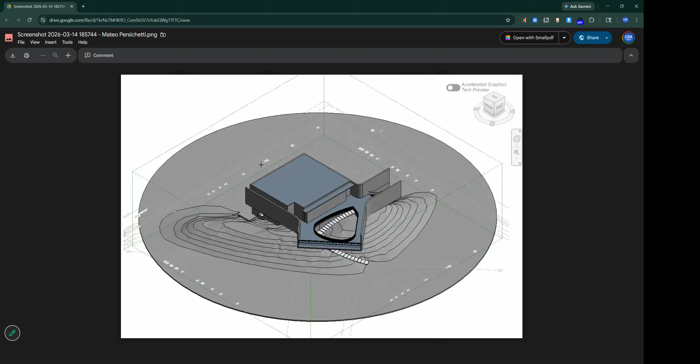So this is good. Now here's what we're going to do for today's class. In order for today's class to be possible, at minimum you would have had to complete target 3. So by my rough calculation, we still have a few people that haven't made target 3 yet.

So even if you have made target 3, you can follow in today's class. What we're going to be doing is detailing the model. It's not going to be very long, so what I'm going to do is we're going to go through the tutorial.

For those of you who haven't reached target 4, I am going to run a little bonus session so that everyone can catch up, because I want to encourage you guys to keep up with the targets. We only have one more week.

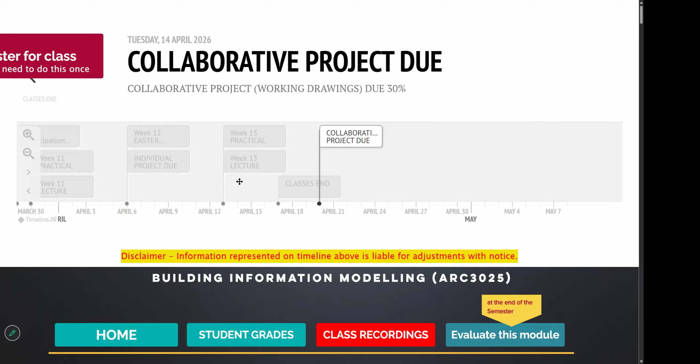All right, guys, because it is dependent on your submission. So I can't stress that enough, that you have to submit your individual project. And this is why I have these checkpoints going week by week, right?

So we are at—where are we? We're here. So today we're going to talk about, we're going to add details. Pretty much the model will be finished today. And—

The lesson that I want us to learn here when we're doing a BIM model is that when you're doing a proper BIM model and drawings, you have to invest time to complete the model first, and then you do your drawings. That is the trade-off when you work in BIM, right?

When you complete the model, that is only half the battle, because remember, at the end of the day, you are delivering sheets and drawings. That is your product as a designer, right?

So if you remember, at the beginning of the class we're forming this—it's almost like we're forming this architectural firm, and you guys are doing the design development phase for a project that I have designed. I have done schematic drawings and I've given you guys the schematic drawings, and you guys are using the schematic drawings to give me

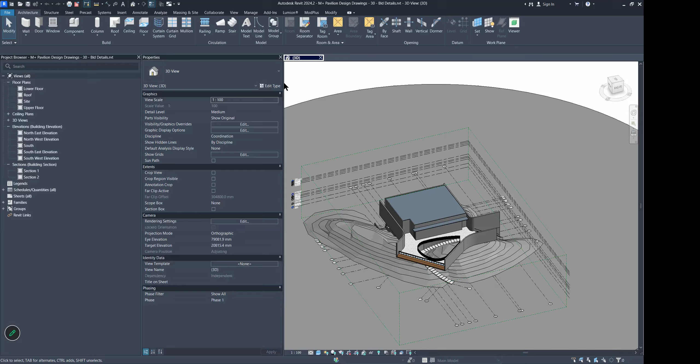Okay, open this up. All right, here we go. So this is where I'm at so far.

If we take a look, by the way, is anybody using the PureRef app? That app that I'm using in the tutorials? No? Nobody tried it out? It's a great little app if you are displaying reference objects while you create any form of artwork.

In our case, we're creating a BIM model. Let me show you here. I think I showed you guys a little earlier. See this.

Okay, here we go. Yes, so this is the app PureRef. It's short for Pure Reference. A lot of artists use this app when they're modeling something and they want to have reference images on the screen while they're modeling. It's primarily for that purpose.

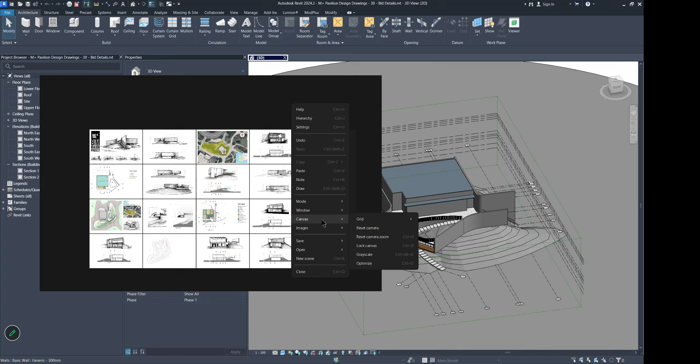For example, you can have... where do you find that now? I don't remember the shortcut. I think it's Control T. No, not transparent mouse. All right, let me go see here. Here, that's it.

What are the settings? Right, for example, you can change the opacity, you can change it to glass. I use this mode sometimes as well, so you can have your drawing without the background, maybe like that.

And maybe you're looking around, you can have this on the screen like that. Other uses: if you are drawing or tracing anything, you can actually overlay this like in Photoshop and trace behind it and stuff like that. So that's the whole idea of PureRef, that's what I've been using to have the drawings on screen while we create stuff.

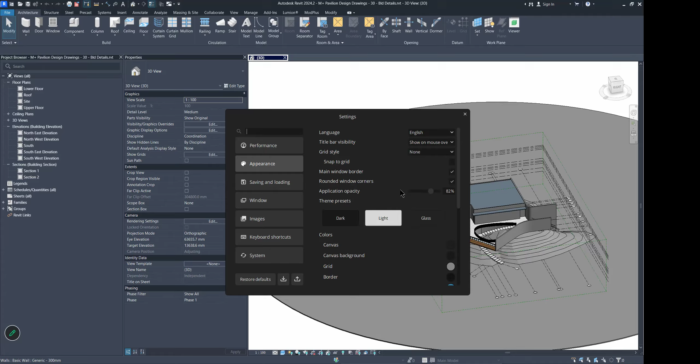Anyway, so what I want to show you guys now is, close that, we're going to be looking at adding some details. For example, if you look at our sketch here, we have this interesting mirror that is going to be on the outside of the building.

And we have some doors. If we look, you can kind of see it here, the doors that lead to the main exhibition space. Then we have a lot of interior details to add, for example bathrooms, bathroom fixtures, the doors, the elevators. All of these details is what we are going to add in for this checkpoint.

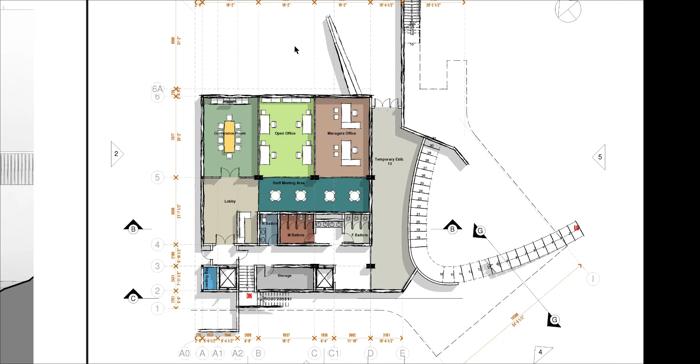We're actually at checkpoint 5, so this is what we're adding for checkpoint 5. Target 4 was last week, 5 is this week, and that will be due on the 22nd. Okay, so let us get going.

Okay, here. All right, so

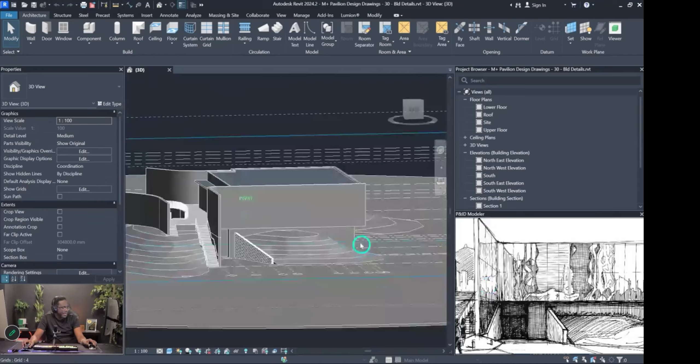What we want to do in our BIM model is find a way to represent this here. If we bring up this view and angle it similar to this view, based on what we're seeing, those reflections, those mirror-like elements are going to be on the facade, kind of like that, and that is what we're seeing here.

One of the ways that we can get this done is by using the curtain wall tool. The curtain wall tool in Revit is very versatile. You can use it to do a number of things, but its intended use is to have a quick way to create storefront windows. However, we are going to repurpose it so that it can act as these reflective mirrors that you see here.

The curtain wall tool is located as a part of the wall tool. If you click the wall tool here, you notice that you're now ready to draw a wall. But notice you can change it from basic wall to curtain wall that you see here.

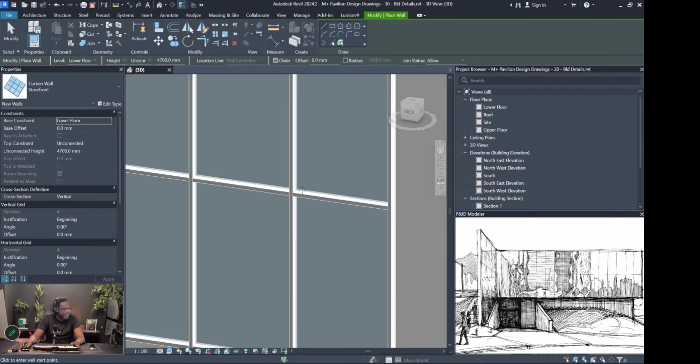Now, by default, if we choose the storefront wall - and I'll just do this in 3D view to demonstrate - and I draw a storefront wall here, this is what it would look like. A typical storefront will have a glass panel and some mullions around it, and depending on the rules of the curtain wall, when you adjust these mullions will auto adjust.

So right away you can see that the curtain wall tool gets us halfway there, except what we actually want to achieve doesn't have any frames. So we could use this and maybe modify or delete the frames in theory.

Instead, what we're going to do is create a curtain wall from scratch. So if I click back this tool here - we created a storefront. Now there is a curtain wall that's not already pre-designed as a storefront, and if I show you an example here, I click it.

I'm going to go to the wall tool here, and change this to just a regular curtain wall, and draw this. What you notice now is that this is also a curtain wall, but it doesn't have all of the mullions of this pre-designed wall - both of them are curtain walls. So usually these are the most common type.

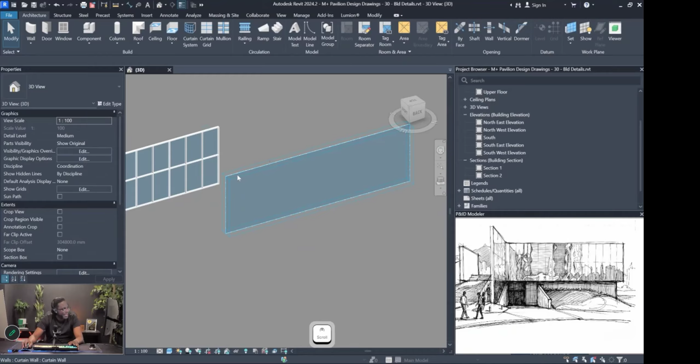The idea of choosing this curtain wall is that I can now go over to the architecture tab, go to curtain grid, and hover over the edges of this to create my own division. So right away you can see that this approach gets us much closer to the result.

Because the idea is that we want to have these reflective glass elements here, and we want to also add the division lines to them, but we don't want mullions. So this method is what we will use.

All right, so let's delete this here and let us start to draw our curtain walls. Now the curtain walls obey the same rules of the road, so to speak, as our regular walls. They have a base constraint and an upper constraint as well.

So if we take a side view here, you can see that we want our curtain wall to fall between pretty much this zone here. We want it to go between this level here, which is facade wall, and this level here, which is cantilever. So that is going to be our vertical restrictions on the curtain wall.

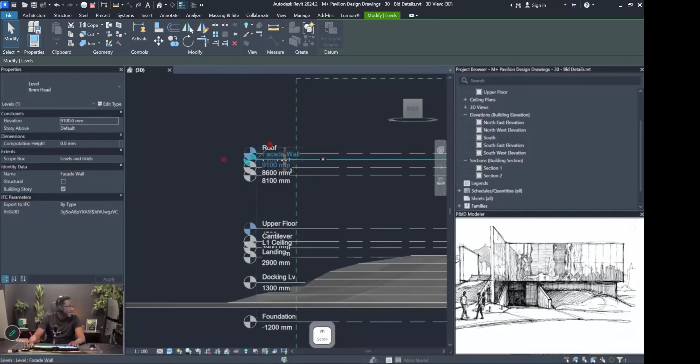So now let's use the pick wall options, and we're going to do this in 3D so that we can see what's happening. We're going to go to architecture, choose wall, and use the curtain wall - not the storefront option, just the curtain wall. Once we click that, yes, we can draw a curtain wall, but instead we're going to use the pick line tool, and then pick the edges of our wall like so.

Right away when you click it, notice that you can see the curtain wall is created based on this wall edge, but it's on the inside of the wall. So we could delete that, and let's do the same thing again.

This time, let's set the base constraint. The base constraint is going to be cantilever, and the upper constraint is going to be facade wall. So now if we use pick line and pick this surface, you'll see we're getting the right heights. Notice that the offset is still on the inside.

So to get a better idea while drawing this, let's go to our plan view, the upper floor plan. This is what it looks like. We're going to have glass all along this wall, so we go to the wall tool, choose the curtain wall tool again, and go to pick line.

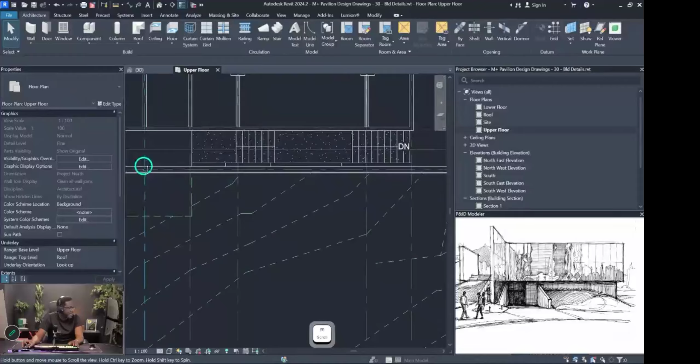Now when we click it here, we get a closer idea of what's happening. Let me press escape, and I just want to take a while to understand what's happening here. When you hover over a curtain wall, you get this blue dash line, which means you have selected all the pieces of the curtain wall. In this case it's just one piece.

Notice I can also tab into selecting the curtain wall glass itself like this, and when you click it, you don't get this dash line. This is going to be important with curtain walls, so let me show you another example.

This is a curtain wall. When I hover and click on this dash line, it selects the entire curtain wall, and then I can drag it and do whatever to it. However, when I tab into selecting just the parts, in this case it just has a single panel part, notice I can't adjust the length or anything. So the first thing you have to do is keep an idea of how you are manipulating your curtain wall. Alright, let me delete this example.

Now if I click on this curtain wall here, I could go to edit type and check out some of the options that I have. These are all the options that the curtain wall has when you click on the entire curtain wall itself. You can change the grid layout, the horizontal layout, materials, and all of these things. Now let me cancel out of that.

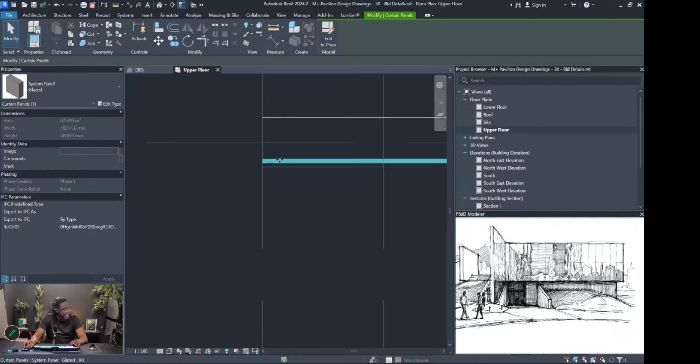Now let's look at what happens when we click on the elements, in this case the glass that makes up the curtain wall. So I'll tab into selecting just the glass now, not the entire curtain wall, and go to edit type. Notice you see a different set of options. So this means you can actually tweak the infills or the parts of the curtain wall individually.

One of the first things I'll probably want to edit is the offset, because notice this is offsetting this way. So I could offset it by 0, and if I apply that, notice now the curtain wall panel is centered. Also, I can offset it by 25 millimeters, which is the same as the thickness of the glass, and if I apply here, actually let's use negative. There we go, now the glass is on the other side.

Now additionally, while I have the glass selected, I can also change the thickness of the glass as well. For example, if I make that 35 millimeters, you'll see the glass getting thicker. So what's happening here is the cross section of the glass is 35 millimeters thick. However, notice that's the full depth of the glass that's here.

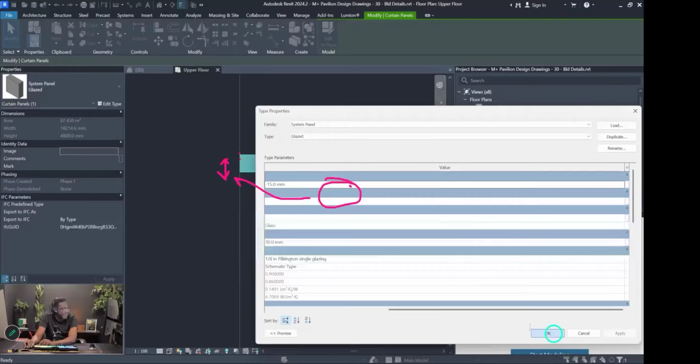If I wanted to have this glass touch this element here, I could change the thickness of the glass to 30 and then change the offset to -15, and you can see what's happening in the background, the glass now comes right on the surface of my wall, because I modified the properties of just the glass itself.

So if I take a look at that in 3D, over this section, you'll see where the glass is now sitting firmly on top of this solid here. So I adjusted the thickness of the glass and the offset of it, but remember the justification is from the center of the glass, so keep that in mind when you're doing offsets.

All right, so if I click on this now, notice that the base level constraint is upper floor. I want to make that cantilever, and the upper floor constraint I want to make that facade wall. Notice that it is in alignment with this.

All right, that's great. Now what we can actually do is click on this wall, and we can use this tool right here, which will just reinitiate the last command. The last command was to make a curtain wall, so it just reinitiated it. Rather than going to architecture wall and clicking curtain wall again, I can just click this to reinitiate whatever object I have selected. Clicking this will create more of that object. So I can go to pick wall again, and I can pick this one.

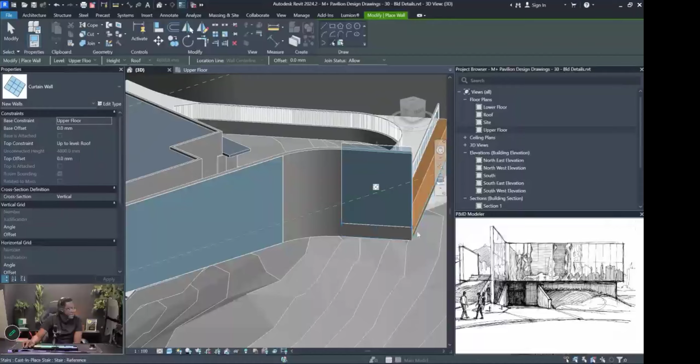And the same thing would apply for this. I would need to change the upper floor to the base constraint to cantilever and the upper floor constraint to facade wall. Oops, I still had the pick line initiated. It's deactivated. There we go. So then we have this here.

Now notice we have this curve, and this is where things get a little tricky. As it is now, if I try to use the curtain wall again, and I pick line, and I pick this curve, notice I will get a diagonal curtain wall, and this is because curtain walls are unable to curve. So we won't be able to use the curtain wall like this, but we can work the system to get what we want, and I'll demonstrate that very quickly to you.

Let's use the concept of the curtain wall. If I create a storefront curtain wall, for example, and I'm going to just draw this example here, just like what we did before, it's going to create a storefront. Now a storefront is made up of panels, and it is made up of mullions. So each of these are actually independent parts.

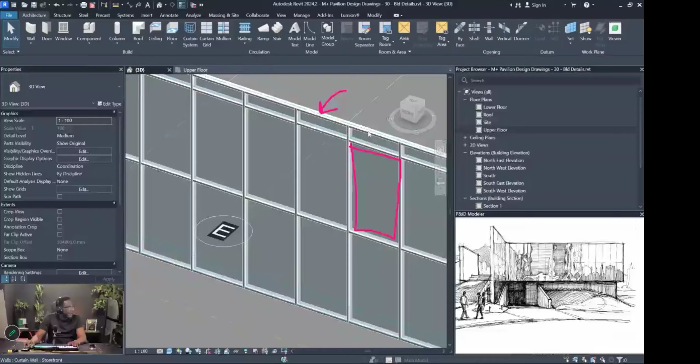For example, if I hover over an individual mullion, I can tab into it. Notice that I can select an individual part. I can select an individual mullion, and I also can select an individual panel. This is very powerful because what this allows you to do is you can swap these parts out with other parts.

For example, if I select this mullion here, first thing I need to do is unpin it, because being pinned, you can't change any options. It's locked, and that's because it is pinned. So I need to click this to unpin it. Then I'm able to swap this out. So I can swap it out for a circular mullion, or I can swap it out for a V mullion. Each one of these parts, I can swap them out.

So for example, if I tab into the panel, I'm going to do the same thing. Let's change this to a circular one so we know it's different. If I tab into this panel here, and of course I'm going to unlock it - remember, this is the number one thing that I always forget to do, I forget to unlock it. If you don't unlock it, you won't be able to swap out that part. So I'm going to unlock it by clicking that there.

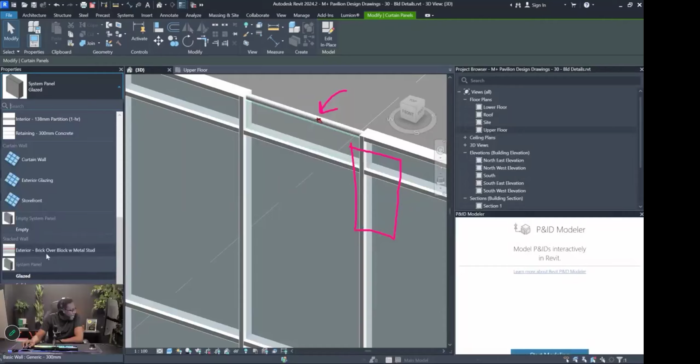And now I can swap this out with other panels. In this case, I have exterior brick panel. I can click that - let's see, I get that message here. Okay, so it's probably because that panel is too small. So let me try this one. Let me unlock it and let me swap it out. Notice that it changes to a different type of wall, but you can't really see the wall because of the size. I can do the same thing again.

So let me undo that, and I can select this panel here, and I can swap it out for an empty panel. What that does is it makes the space empty. So if you look here, I've swapped this out for an empty panel. I've also swapped out the mullion for a round version. This example is just showing you that you can swap parts out.

Now, the reason that we are doing this is that we could select a panel, for example. So let's say I've selected this panel and I've unlocked it. I can swap that panel out for not only curtain wall parts, but also any wall part as well.

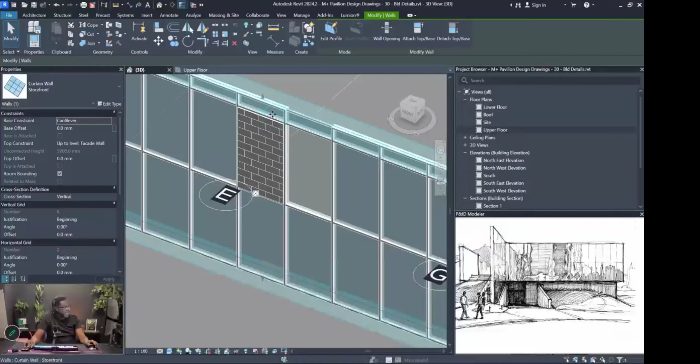So for example, I can swap out the panel for a 200mm CMU wall, and there you go. I have now infilled this curtain wall with a CMU wall. So the ability to swap these things out makes the curtain wall tool so valuable and versatile.

And that is how we're going to solve the problem here with this curve. So let's get back to the curve now, now that we understand a little bit about how to swap out components with the curtain wall tool. So armed with that knowledge, let's go back and look at our curved wall here. Remember, when we choose curtain wall, I'm going to choose the regular curtain wall, the blank one, and if I try to pick lines so I can get the curtain wall to follow this curve, it doesn't.

It goes straight. However, what we can do is select this panel, and I'm going to tab into it. So I've selected that panel now, which is a system panel glazed, and system panel glazed or curtain wall panels cannot be curve bent. Instead, what they are made to do is break down into individual straight pieces.

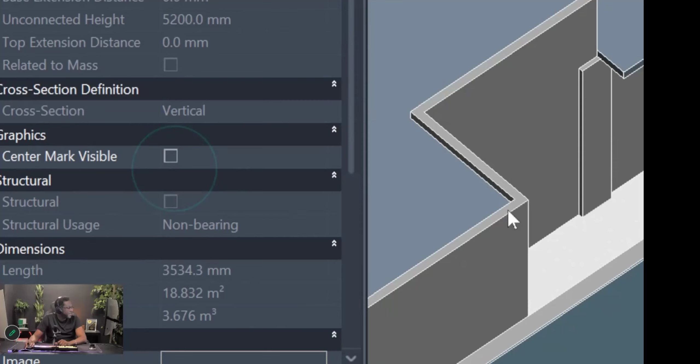However, if I change this out from a system panel to, I'm just going to use CMU wall, then what you notice is that the wall is able to be curved. Now in this case, what we did was put the wall in a panel, and then the panel can now curve. So that is a little trick that we can use to get around having a curved panel.

Now, of course, we don't want the panel to be a brick wall. So in essence, what we need to do to kind of trick Revit into doing this is to create a wall type that is glazing, which is going to be different than a curtain wall panel type. So let's create, instead of using a brick wall, we're going to create a glass wall type just like this. Now to do this, we are going to use a regular wall.

I'm going to go to the wall tool here, and I'm going to draw - I'm not going to use a curtain wall, I'm going to pick any random wall, maybe the generic 150 millimeter, doesn't matter which one. So I've drawn a wall here. Now the objective is that we want this wall to be the same material as this. So essentially we're creating a glass wall.

Now in order to change materials in Revit, if we click on this wall here, we're going to go to edit type. Then we're actually going to duplicate this type here, and we're going to call this glass wall.

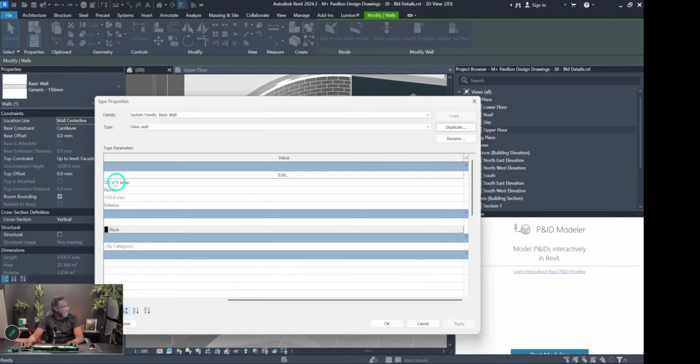All right, now we want this wall to basically look, we want to configure it so this wall pretty much looks like this surface here, right? And in order to do that, the first thing we need to change is the thickness. So let's make this a little smaller.

So if we go to structure, and let me go back there so you can see where I went. Right, so if we go to structure, that tells Revit what thickness to make the walls. And what we're going to do is change it to the same thickness as those walls, which is 30 millimeters. Now in addition to that, we're also going to change the material.

And if we click that, you will see your materials list comes up, and we're going to look for glazing, and I guess we can use this one. So we're going to choose OK on this, and OK. So notice now this has become a glass wall just like this, but the thing is, this is a wall.

So now what we're going to do is click on the CMU wall and trade it out for our glass wall. Now we probably also want to click on this wall here, and we want to let the location line be maybe at the exterior.

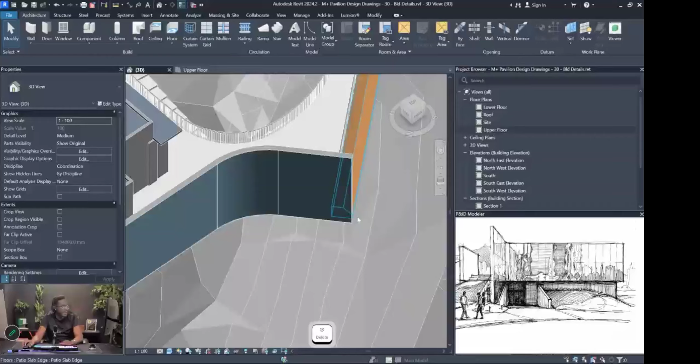So that way now it can be aligned with our wall, with the glass wall, which is a curtain wall panel. So we're going to delete this sample here. So this is how we get the surface of this to be a glass wall.

Now we're going to do the same thing here, and we're going to go to wall, and we're going to draw a curtain wall, and we're going to use pick line again. I'm going to pick these surfaces here. We're not going to get the curve, remember.

We're going to pick the surface here. All right, so we need to change the levels for this one, since this one is a little lower than that one. If we take a front view, we can see that this side of the wall is going to level 2 ceiling. So all we need to do is select our new glass walls and change the top constraint to level 2 ceiling. There we go. Now we're going to do the same thing again.

We're going to swap out this system panel glaze, because remember, system panel glaze is unable to curve, and we're going to swap that out for our glass wall. Then we want to fix the center line justification to, let's try exterior. Right, so that's what we get. So now we have created those mirrors, those reflectors, on that glass wall.

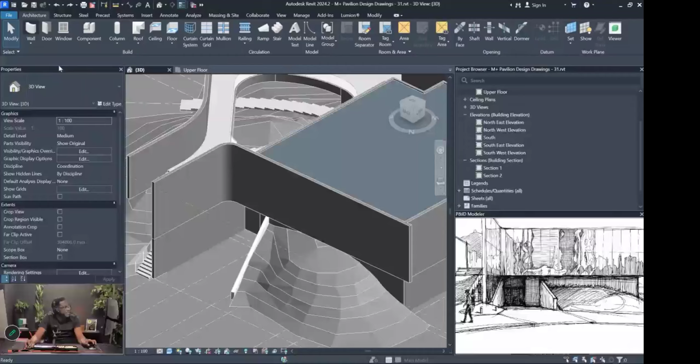All right, now that we have these surfaces covered with glass, let's also do this surface as well, because we can see that this is also happening here. So again, we're going to choose curtain wall, pick line, and pick this surface here. We need to set the height of that. We're going to click the curve again, and click this face of the wall. We're going to select this guy here, and swap him out for a glass wall.

Hold on, let's do that again. You have to make sure that you select the actual infill panel, right? And then we're going to change this to glass wall. It's actually creating two glass walls. Hold on. So let's make sure that we select that panel, and then we're going to choose the same glass wall there.

So now it's curved. A couple of things. Firstly, this is a little bit shorter, that's why we're not seeing it good. Also, we need to set this location line to finish face exterior, and then we're also going to set the height of this. So if we take a look here, let's spin this around. Right, this actually goes up to this height, which is the roof level.

So we're going to select these mirror-like elevation elements, and we are going to select all three of them. Let's select one at a time, and we're going to make the top go up to roof, and this curved one we can actually just adjust it manually.

All right, good stuff. Now if you notice, this wall here has this kind of coming at an angle. Let's see if there's a better view. Well, that's pretty much a view. So you can see this comes down at an angle. So what we're expecting is that this glass will come down. So what we can do for that is click on this here, go to edit profile, select these two guys, and just pull it down like that. It's okay. Right, and there we have it.

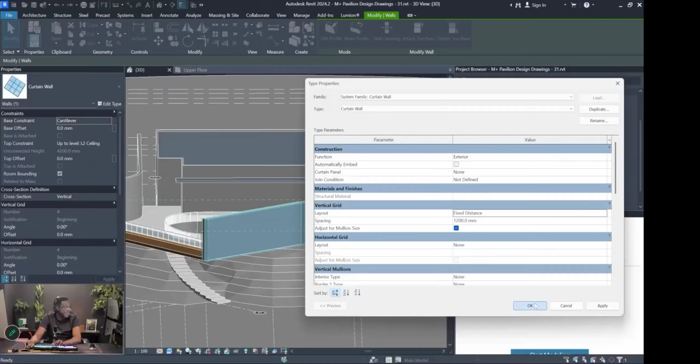Now if we want to divide these lines nicely into individual panes, we can select this curtain wall type and go to edit type. Whenever we edit anything in here, it's going to edit for all the curtain walls that fall under this type. What we want to do is mess around with the vertical grid, so we can set all of these curtain wall types to have a vertical grid with a fixed distance, and make them all 4 feet. Let's round it off to 1200 and choose OK. And you'll notice now that all of these are divided.

So let's go back into edit type again, and this time we're not going to mess with the vertical grid, but the horizontal grid. We're going to say fixed distance, and make this, let's try 8 feet, or let's do 2400. Apply. There we go, you can see it's divided there. Let's go to 4000. No, 2500, 1800. You can see that, see this now, that's the division of everything.

So there we go, now we have created those elements. Well, this one here is not going to do automatically, so we're probably going to have to cut this, or we can actually move it. If we hover to the dash line, we can move it. We need to unlock it first, and we can move this dash line here. Same thing for this, unlock and then move this dash line up. So now everything is in alignment. All right, so that is how you get these elements, these reflectors, to be on the outside of the building.

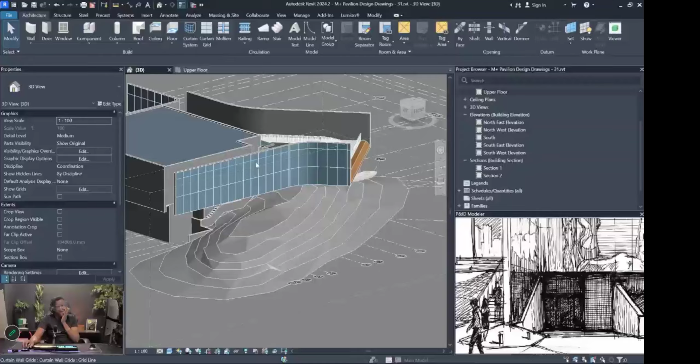All right, so now that we have these curtain walls, now we're going to go ahead and add in these doors that you see here.

If we take a look at our sketch, you can see that along here we have some doors. Let's take a different view. We can kind of see these doors here, that's along the front, and we get a better look if we look at this section. So facing the patio, all along here there are going to be doors - 1, 2, 3, 4, 7 doors to be exact, and then another smaller door here.

We also have doors on the lower floor in various places, so we're going to insert most of these doors now. The first door we want to insert is going to be along here. Now, rather than inserting multiple doors and worrying about the width of each door, we're going to use the curtain wall tool.

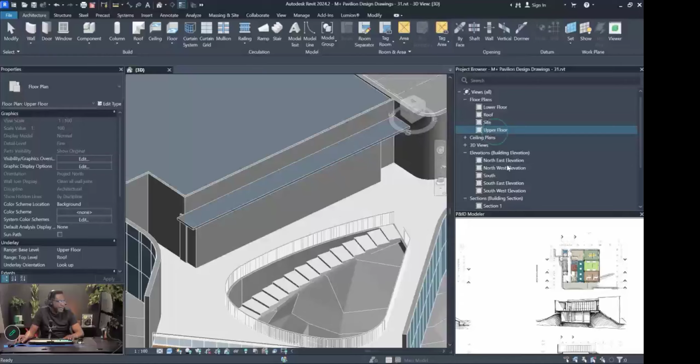So we're going to go up to the wall tool again, and this time we're going to go to the upper floor plan. If we zoom in here, you can see the idea is we want to have doors all along here, right? All along here.

So in 3D view, let's go ahead and use the section box here. Let's cut down to see what's happening. Okay, so on the upper floor, the reason we're seeing these lines here is because these walls are coming right up to the surface of the floor.

So we need to select these walls here and say attach top base, and we need to attach the top - make sure you're on top - to this floor that is here. Let's see if we can select that floor. There we go. Attach top base, select the floor, and we want to do the same thing for all these walls.

Now, that is going to be one of the main things that you will notice throughout the model: you are going to have to select all your walls and attach them to the top and bottom of your slabs, right? The neater your BIM model is, the less work you will have when it comes to generating your drawings.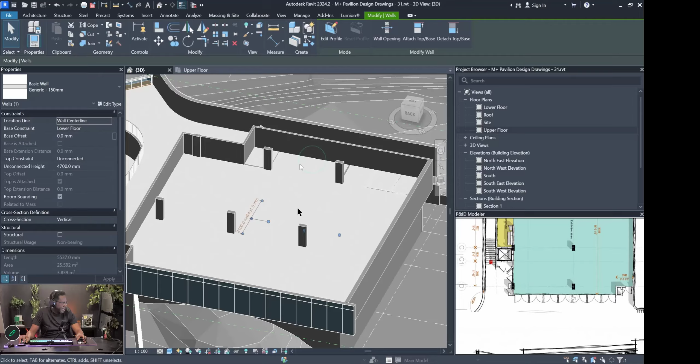The floor, and we want to do the same thing for all these walls. There we go. All right, so now on the upper floor, this is what we get.

So we also need to remove this wall. This wall should - let's take a look at that in 3D here. There is actually no wall there, this is actually an opening, so this is fine. If I take this up, there we go - you can see that this wall here is really just an opening that's here. So we're going to have the doors all along this wall that's here.

So heading back to the upper floor, we will go to curtain wall. This time we're going to go to storefront, and before we draw, we're going to create our own storefront. So we're going to go to edit type, and we're going to duplicate this curtain wall type, and we're going to call it entry doors. We're not going to change any options yet, and then we're going to draw this curtain wall inside this. Okay, hold on, let's do this again.

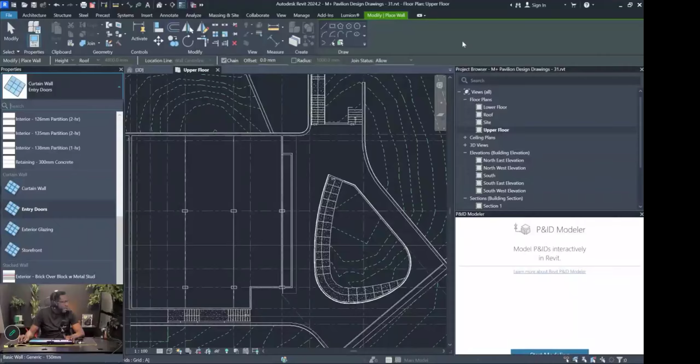All right, so with that curtain wall we just created called entry doors, we're going to draw that curtain wall in the middle of the wall. And if we look in 3D, this is what we get.

Let's disable the section box by unchecking it here. There we go, so this is what we get for the curtain walls. Now, of course, what we want to do is let the curtain wall go up to this level here underneath that entry slab. If we look on our elevation, you can see that the entry slab height is going to be on what we call level 2 ceiling. So we're going to select this curtain wall, and we're going to let the top constraint be level 2 ceiling. There we go.

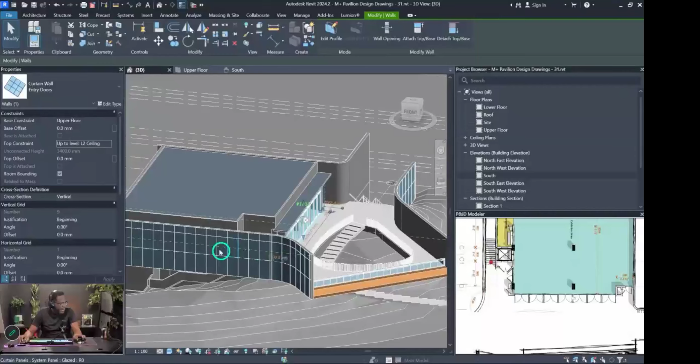Now, because we're having all doors, we don't need this horizontal element here. Now, we use the curtain wall to create these reflecting panels on the outside, and we took a blank curtain wall and divided it up. So in this case, what we're going to do is the same thing.

We're going to choose the curtain wall tool and go into edit type, and we're going to say for our vertical grid we want none. So if we choose OK, let's see, and what we're going to do is if we tab, you can tab into the... yes, let's actually undo that.

What we actually want to do is, if we go back into edit type here, is not to remove the vertical grid but the horizontal grid, right? So the horizontal grid would be equal to these grids here, and the vertical grids would be equal to these here.

So in order to remove the horizontal grid, we won't use these settings, because if you choose that you don't want any horizontal grid, you're actually going to get an error saying you need to delete them manually. So what we're going to do is tab into the grid here, ensure that you unpin the grid, and then you just hit delete, and that's how you get rid of the grid.

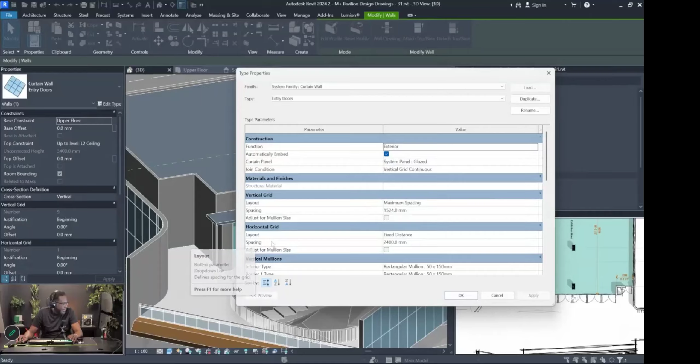Now we need a total of 7 doors, but we have more than 7 spaces here. To fix that, we're going to go back into the curtain wall type settings, and say... vertical grids, put that to a fixed number. We choose OK, and then where it says number of vertical grids, we're going to put that to 7, and now we have 7 spaces.

Now what we need to do is change these 7 spaces from glass panels to doors, and to do that we would need to replace each of these panels, just as how we had replaced this panel here with a wall. In this case, we want to replace these panels with a door. So if we click on the curtain wall tool here, go into edit type, we can see here where it says curtain wall panel. Right now it's set to glazed.

We can actually change that to a door. So if we scroll, you might see that we can change it to walls, we can change it to empty, but we have no doors as options to change the panel to. So we're going to choose cancel. We're going to load in some doors.

So we're going to go to architecture—insert rather—and then go to load family. Once this is up in the default folder, we're going to go into doors. This is important because there are different types of doors, and we're looking for particularly curtain wall infill doors. You will know that because you will see it has the curtain wall distinction in front of them. So all of these doors here can be inserted into a curtain wall, but if, for example, you input a regular door, those doors cannot be inputted into a curtain wall.

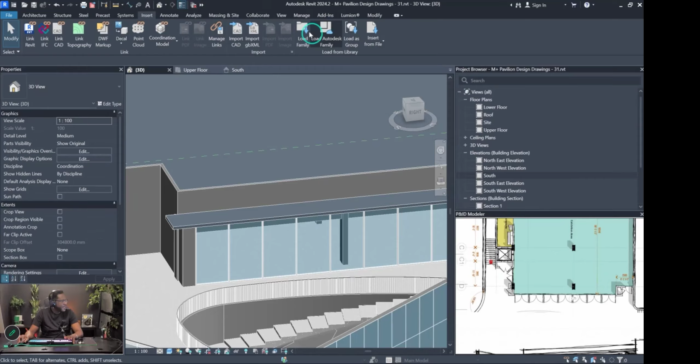Now we're not finding that curtain wall door, because that door was actually not a curtain wall door. So if this happens to you, where you don't see the curtain wall door when you try to swap these panels, just go back to insert load family and choose another door. We're going to choose this one called door curtain wall double storefront. This is the actual correct one.

Now we're going to go into curtain walls here and go back to the curtain wall panel that we see here, and there we go. Change it to those doors, and we're going to choose OK. So now we have these doors, and they actually have handles, but you're not seeing them because the handles are set to show only when the detail level is set to fine.

So there they are. Now we have these curtain wall doors. Now we do have some other doors that we need to place. For example, we have a door here and a door here. So let's go ahead and start placing these other doors.

And to do that, we're going to go to the floor plan that's here. And in our floor plan, well, we can actually correct this, because notice that we're seeing this as a wall here. The reason for that is because of the cut plane. So before we add the doors, let's go ahead and edit that cut plane.

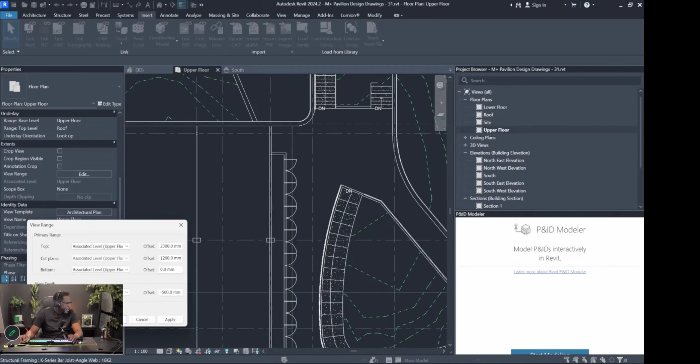So we're going to go ahead and change our view range, and set the cut plane here, and change the view depth. Let's change the view depth to 0. There we go. Okay. So we're actually seeing too low, we're seeing below, and that's why we're seeing this line here. It was the view depth.

So let's go ahead and add these doors. We're going to go to architecture, then doors. Now if we see here, we only have a single flush door, so we need to load more door families. We do that by hitting the load family here.

Now, a quick thing to notice, when I go into, for example, doors or windows or any category here, components, there is always a load family that's here. Now, if I am on doors and then I go to load family, I am only able to load doors into the project. So for example, if I go to windows and try to load a window, it's going to say you cannot load windows because you selected door and then you're trying to load a window family, which doesn't work. So if you want to load any family into the project, you would go to insert and then go to load family. This allows you to load any family—doors, windows, curtain walls, anything.

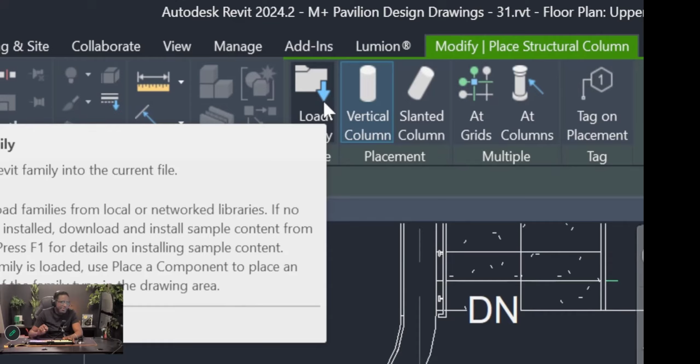But once you go into a particular category, so for example, if you go into columns and then go into load family, you're only going to be able to load columns. So this is one of those little things you have to notice about loading families into your project.

So in our case, we're going to go ahead and go to doors and load the doors, and let's load some commercial doors. So we're going to go to commercial and let's load the commercial single door in, and this is going to let us choose what size door we want to load in. So let's choose this one, 36 by 96. We can load that in, and this is going to be on this side.

All right, so we're keeping in mind what's happening on the actual plan. We have this little space right here, so let's go ahead and get that in. So I'm going to copy this here and extend this. I'm going to use the trim tool and trim this up like that. So we're getting this little space in here.

Then we have a little small door that's in this space here. So we're just going to use the ordinary door, maybe one of these. There we go.

And we can adjust the door width. So for this door here, we're going to go to edit type and duplicate, and we're going to call this closet door 2 feet. Then we're going to go into the door width and change that to 2 feet. It will give us the millimeter equivalent. The reason why this is giving us millimeter is because this template was started in millimeters, and this door was in this template as a metric door, so it's going to always convert it to metric. We're going to choose OK.

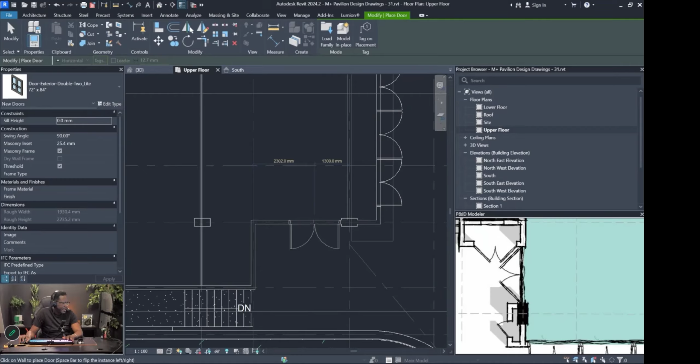So we're going to go back to doors and we're going to load in the double door. We're going to take 72. Yeah, let's take that one. So these doors are somewhere about right here based on our sketch diagram. We have another little closet that's going to be right here.

So we are going to select this wall and choose this option here to create similar, so we know we'll be creating a similar type of wall. Okay, let's put it in first. Let's trim this up and let's align this. There we go, maybe it's a little smaller.

We can probably make the internal measurements in here, so let's set this to something reasonable. So we're going to tab and move this dimension and tab to here. And we're going to set this to 2 feet. All right, so we know that this is 2 feet.

Then we're going to add that closet door 2 feet to here. I'm pressing space bar to swap it around. There we go, now there's another closet here. And then there's going to be an elevator here in this section.

So let's go ahead and move this down to here. We'll choose this option here, draw another wall here. And then we're going to use a trim tool, TR shortcut, and trim this up. So that's going to be that elevator that we have there.

In front of the elevator, we actually have another storage area. So we're going to carry this up and draw another wall like this. Use a trim tool, trim that up. We're going to put that, let's align that. Then we choose this door, which we're going to put another door like that here.

This door actually swings out. All right, now we can actually control these swings. So we can set these swings to like 30 degrees. Yes, this one here doesn't have a swing, but these doors do have a swing that you can control, and so does this one as well. This one has a swing, this one doesn't.

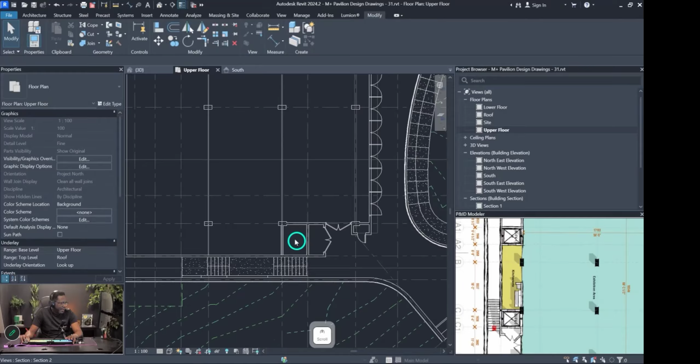All right, now let's continue putting in these doors. Okay, so we have an elevator that's going to go here, and we have another elevator that's going to be down here. So this space here is going to be equal to this space here.

So we need to add some walls in that space. So let's go ahead and I'm going to choose one of these walls, and this one is going to go all the way back. There we go. All right, now this elevator opens on this side here, and this elevator here opens on this side.

Now, in order to load the elevator, what we need to do is, an elevator is not a door, it's not a window, it falls under component, right? So a component is pretty much any object that you insert into Revit. So while you're under component and you go to load family, you will be able to load the elevator. But if you are under window or door and you go to load family, you will not be able to load the elevator. So that's an important point.

So I'm going to go to component, then I'm going to go to load family. Then under the default family folder, you're going to look for vertical circulation. And we have two elevators here: electric and hydraulic. So we're going to choose electric and choose open. Now, once we see that, we'll have the elevator to place.

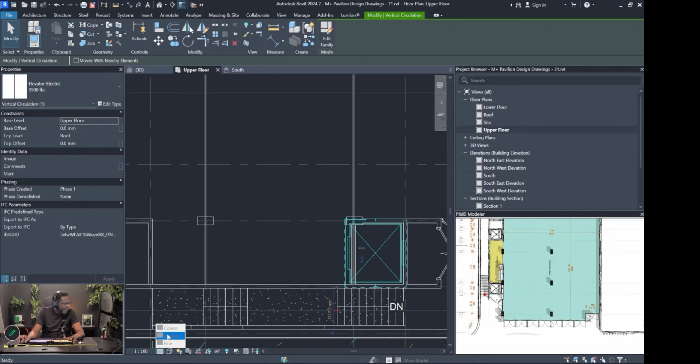So we're going to drop the elevator here. Let's rotate it, so this elevator opens on this side here. Now, keep in mind that depending on your detail level, it will depend on how much information the elevator shows.

Now, let's get the dimension of this space here. So if I go to DI dimension, we can see this space here. And if we click here and we go to edit type, you can see we have the overall dimensions here: the width and the depth.

So ideally, we would want the width to be 2281 and the depth to be 1786. And this is just saying that it's going to cause an error when it's trying to reconfigure the sketch. So you can see it reconfigured it here, but the cab width and depth needs to also be changed.

So let's go back into edit type. So the cab width and depth needs to be smaller than the width and the depth. So the depth here is 1786. So we're going to make the cab width be, let's try 1600, and no, this is the depth.

So we're going to let the depth be 1600, and then the width is 2281 here. We're going to make the cab width be maybe 2100. All right, that's a little smaller. I think they need to be a little smaller as well. Let's try 2000 and 1500. There we go, so this is much better.

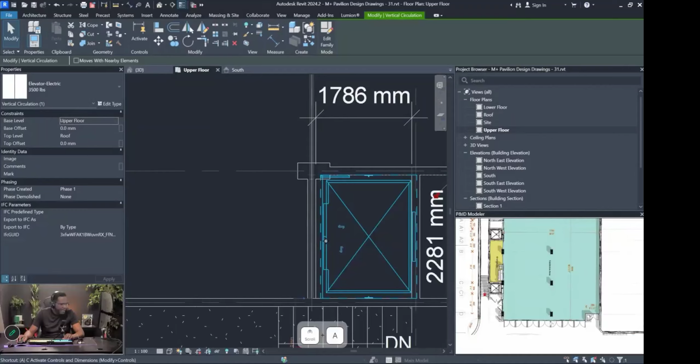So you might notice that you have to set these dimensions up manually. So now we should be able to fit this in. There we go, all right. Now we're going to copy this over to this one here, which is around about the same.

We're going to flip this side to open. All right, so now we have the elevators in. We need to insert the elevator doors, and to do that we're going to go back to component, load family.

And then you notice we see the elevator doors here. So we're going to use a single side door, because these elevators might not be that big. Okay, let's use a double door. Okay, let's open that, all right, then we're going to insert the door.

Now these go into walls, so we're going to insert a door here as well. There we go, and we can line this up. All right, so we have our elevator and elevator doors in. So let's delete those dimensions there, and that's looking nice.

Okay, now let's go to the lower floor. All right, so let's look at what we have on the lower floor. So on the lower floor we have some entry doors that's going to be on this side here. Let's use our floor plan here. So if we look at this section here, which is what we have here, we do have some doors here.

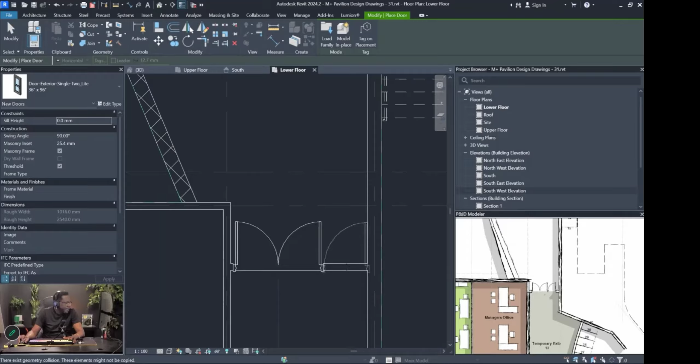So we're going to put a double door, so we're going to put our double door here. It's going this way, and then we're going to put a single door right beside it. Select them and we're going to move this all the way to the end. Let's use the align tool.

All right, then we have some doors in this, well, this space is going to be open because this is an open office. So we're going to remove these, and then we're going to put some doors in this curtain wall that's here, but we'll need to customize it.

So with the curtain wall selected, we're going to hit this icon here, and this will take us to a 3D view showing the curtain wall, which is this guy here. Let me expand it out a little bit. Okay.

So I can see where I'm at. Okay, so this is it here. So this has a double door that's going to be here.

What we can do to even out these spaces is we can select the curtain wall, and let's go to edit type here. So let's first change it to, we're going to call this meeting room curtain wall, and we're going to say that the vertical spacing, we're going to set that to fixed number. We're going to have this at 4.

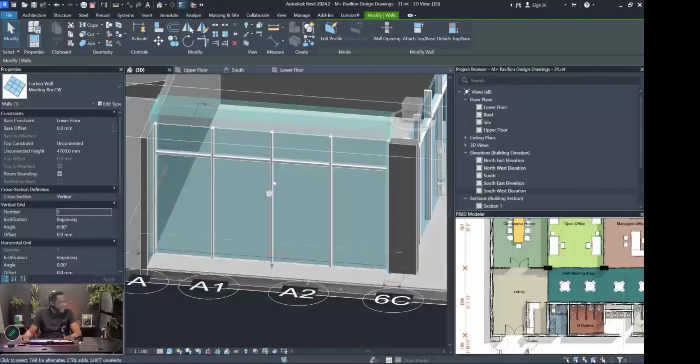No, let's have it at 2. Now let's put it at 3, so it will divide the space into 3, and then we're going to modify it. We're going to tab into this division. Again, this is where you see that dash line, if you can see that there. And we're going to unpin it, and then we're going to delete it.

Now, if we notice here, if we try to hit delete even after unpinning it and it's not deleting, the problem is that the grid lines are tied to the makeup of the curtain wall. So let's go back to curtain wall, and what we have to do is we have to say, okay, the grid, what we set to fixed number, we're going to set it to none. So that way the division of the grids isn't tied explicitly to the grid layout.

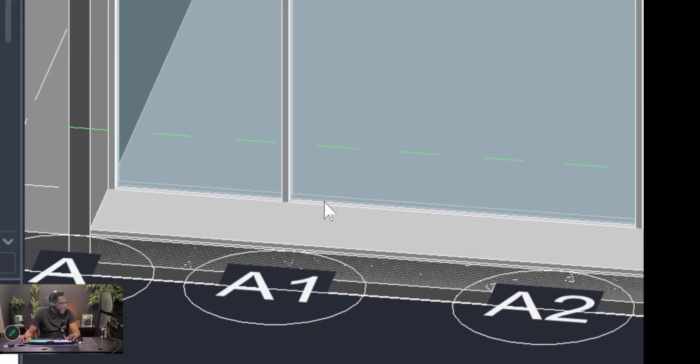So it's going to warn us that it will not be associated with the grid layout. That will give us the freedom to now remove any grid lines that we want to remove. And then now we can tab into the curtain wall here. We can get to, there we go. And then we're going to unpin this curtain wall panel and swap this out with a curtain wall double door like that. So that's how we get that meeting room there.

So let's go back to our lower floor, and we can see that we have that door there.

Now we need to add in this bathroom area here and these bathroom walls. We can see that this wall is pretty much at the halfway point between this space here and that space here. So what we can do is use detail line and draw a line from here to here.

The halfway point is going to be about this area here, so we're going to choose this wall, and we're just putting in some walls to set up this space first. Then we're going to trim it up and remove these construction lines. Let's trim this up to here, so that's going to be our space, right here.

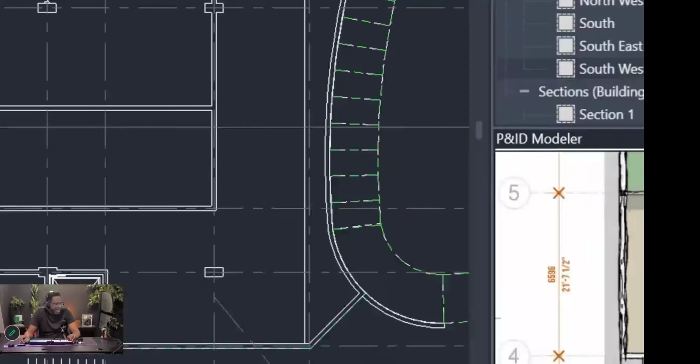Then we need to divide these spaces based on what we have. We can see that we're going to have a male and female bathroom, right here. This wall here is going to be on this grid, so we know already that we're going to have a wall on this grid. We know the other walls will be somewhere, one about right here, and another about right here. Even if we don't have the exact locations, we're just putting in the rough locations of the walls first.

We're going to have another wall here, and this is mainly to carry all the pipes, in this area here. Now we need to put in the bathroom stalls and all of the water closets, and of course the doors.

Now, in order to place the toilet stalls, we are going to depend on the built-in standards that Revit has, and that will help us determine the length of these rooms. So we're going to go to component, go to insert, and then head over to the main root folder.

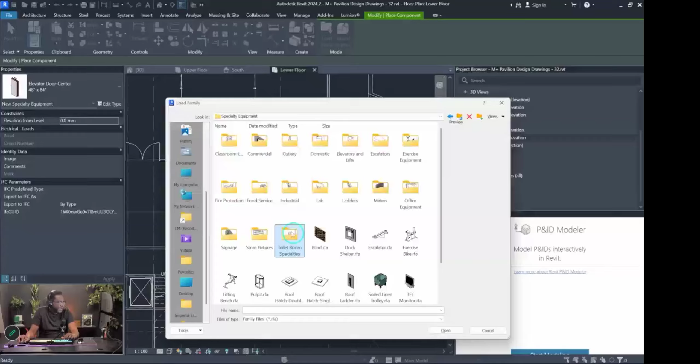I'm still in the US Imperial folder of the family folder, and I'm going to head to specialty equipment, then toilet room specialties, and then I'm going to load the toilet stall. I can load the one with toilet or without toilet, so let's load the one with toilet. Choose OK, and this actually attaches to a wall, so we can put one in there.

It's two. Then we have two with urinals, so we can go back again and choose the one with urinals here. We can just choose a urinal with screen, that's going to be here and here.

So let's use our align tool. There we go. And then we can align this wall there. So we're pretty much using the standards. Let's flip this the other way. Let's use the move. There we go.

So then let's go ahead and add the other stalls here. We're going to copy these and flip them the other way, then move them over here, making sure these lines are aligned. We're going to do that to there, that to there, and then that there, and carry this wall back to there. Then we're going to have a handicap bathroom on this side.

For this one, we just need to put the water closet, so we're going to go to component, and this time we go to plumbing, architectural, fixtures, and then water closets, and we will choose this one, commercial. Okay, no, we're not going to overwrite this. Yeah, we'll overwrite it and we'll just put this here.

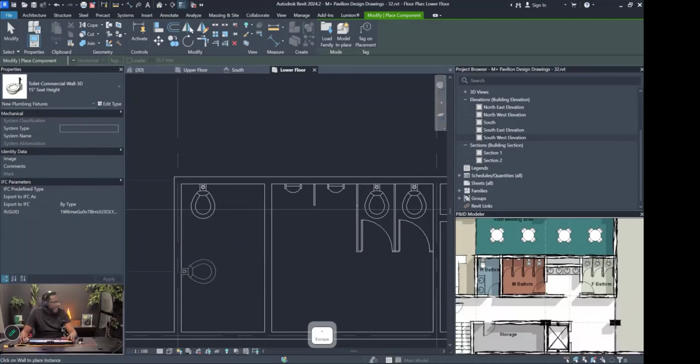All right, so now we have all the water closets in, and now we need to deal with the sinks. We're going to head back to component, load family, back to specialty equipment, back to toilet room specialties, and then go to countertop with sinks. I'm going to open that and place that here. These are all wall hosted, so they have to be attached to a wall, so keep that in mind.

So we're going to align this here, then set the length. What we can do is get the distance from here to here. It's 2723, so we can go here and set the length to 2723. All right, so now we have the sinks.

We're going to put another one here. We can actually just duplicate this here, or put another one over here, and then we're going to shorten it so that it gets two sinks. That's how we'll have this section here.

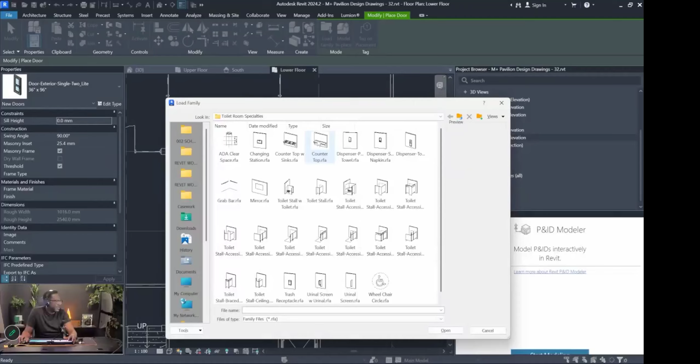All right, so now we need to add the doors. So what we're going to do is go to doors, and we're going to actually load in some more doors. So we're going to go to the door.

And let's go to commercial, and we're going to load in some commercial doors. Let's use these, the 36 by 96. We're going to add in these doors, and now we have a door opening, so we need to load that in. A door opening is actually a type of door, so put that there. Now we have a door opening, and yes, 36, so that's fine.

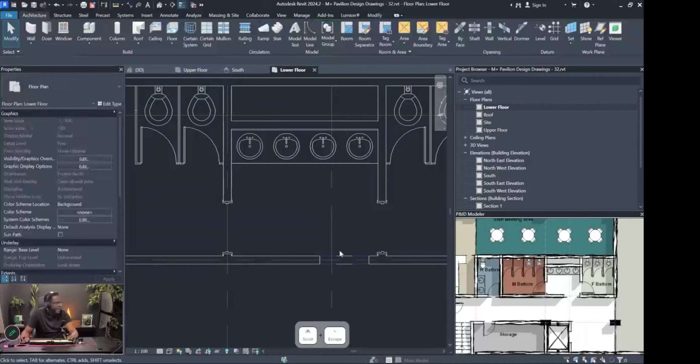So now let's see if we can align most of these in. We're going to change the inset to 0, so the doors are within the block wall. For these doors here, we can just turn off masonry frame, so that the doors will have a trim. Another thing you might notice is that the door swings aren't showing here.

Let's select all the bathroom area here and just click this 3D icon, so we can see what's happening. Let's make it a bit wider. I think we've spotted our problem.

There seems to be a surface that's here by mistake. That is a ceiling, so looks like this was an error here. I'm going to delete that ceiling. Let's go back to the lower floor. Yep, our doors are fine. So uncheck masonry frame for these doors. All right, so we have pretty much the bathroom spaces in.

Now we need to add in the back door that's going to be here. Let's take a look at what's happening at this back door. We're going to select this area and say view in 3D. So that's going to be this area here, and there's actually going to be an opening here. I'm going to insert a wall opening somewhere about here, and that's going to be the opening in this wall. So that opening there is this opening here.

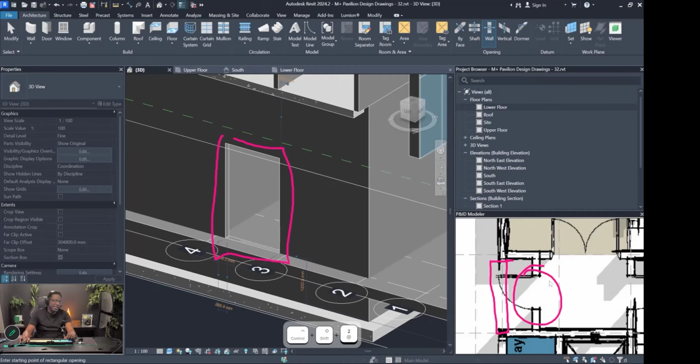And then we're going to add this door behind this area like that. All right, let's align this. Let's go back to our lower floor here, and we can align this, and then we're going to add in this wall here, and add in some more commercial doors.

So we're going to add this one here. There's also a double door that's going to be here, and then we're going to have that reception desk in this area. We have another one of these doors here, so we're going to copy this. Let's flip this on the other side. This is actually on this grid, and then we have another door here going into the storage area.

All right, okay, let's look at this, what do we have here? This is our floor slab. So our floor slab needs to come all the way to this curved wall here. If we take this area and look at that in 3D, that's this area here. Let's carry this down. So our floor slab needs to come up to here.

The other thing is that this represents where we had that void object to cut out this space. The void object should actually go below the ground plane, because you can see it intersecting on the ground plane. So we need to edit that.

In order to select the void object, we won't be able to see it to select it, so we'll have to go in our project browser, and we can go to what I think we called topo cut. So we're going to select it in view, and then go to edit in place, and there it is right there. We need this to actually go below the ground like that.

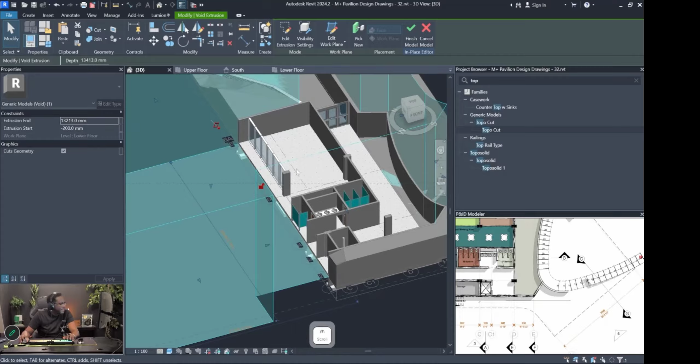So now we can see it's not intersecting with our floor plane. What we're going to do now is select this floor plane here, and we're going to let it expand to this wall here, using the pick walls option.

We're going to trim it up. Let's go here and pick this surface. There we go, choose OK. All right, so now this is what we have here.

This area here is going to be our temporary exhibition space, which is partially underground. You can see the steps - if I rise this up, you can see this is the area where the steps go up to the other floor. So this is going to be partially underground, and you enter here. Oh, we do need to set the door heights here.

Right now, these doors, we're going to set everything to 7 feet. So we're going to set the height to 7 feet, and we're going to set the door height for these doors to also be 7 feet. All of them will change because we changed the door height in the family. All right, good stuff.

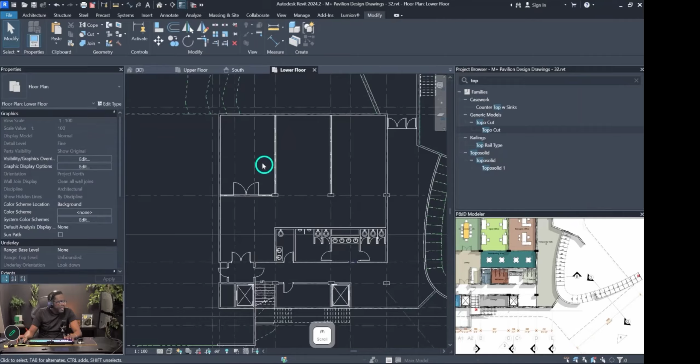So let's continue adding details. Now we're going to add the furniture. Let's go ahead and go to component, and we're going to go to load family, and now we're going to go to furniture. There we go, and we can go to desks and tables.

Let's load in this dining table and chair, and we'll put a few of these here. So there we go. Let's add in some desks.

Furniture again, let's go to desks. We can just pick any one of these desks, choose a generic one. Usually in Revit, we are choosing desks that are pretty much placeholders, so even if you don't have these exact desks, that's fine. The exact table and chair is usually left to be determined later in the project.

So what I'll do is just add a few desks here, just add 3 there. Then I will add some chairs, the seating - I'll just add some standard office chairs right here. Then I'll probably select these here and create a group, and just call it office desks and chairs.

And then I will mirror it, create a mirror copy and then duplicate it. That's fine, that's for representation - we're not going to go into the layout of the office, so we just need to represent it there. And then we're going to add in this conference room table.

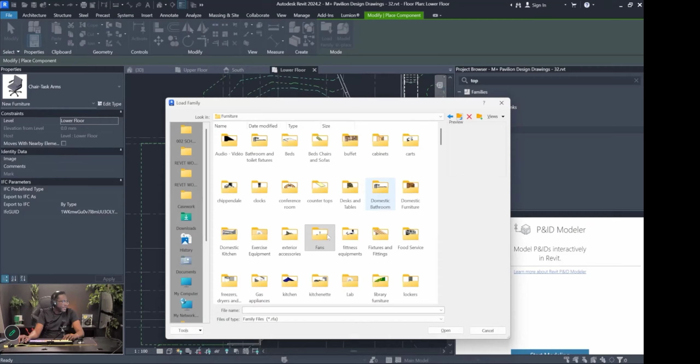Let's see, conference room, and here we go. We could add one of these or one of these. Let's add this one. Now if you don't have this exact conference table, that's fine - you can just put any table in that space.

All right, so we have added most of these furnitures. Oh, we do need a reception desk here, so I'm going to go back to load family and probably look under desks, tables, and I will choose maybe something that has an L shape, perhaps like this. As I said, we don't need to get too hung up on the furniture. We might pull it back a bit.

All right, so I believe we have everything in here. Oh, we need a space for the loading bay, so we're going to insert another opening there. Let's take a look at the back again. The loading bay is going to be here, so let's copy this opening over here, and this one will possibly be a little higher because the trucks are going to back up in this section, or we'll just leave it open. Let's go to the lower floor - right, so that's going to be the loading bay.

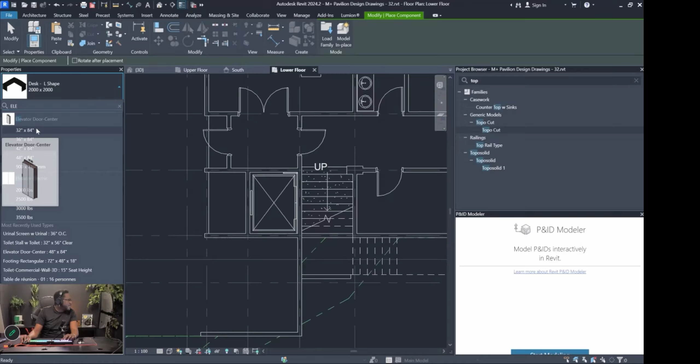And we will need to put the elevator doors on this side. So let's go to the elevator doors - let's type elevator doors, center 36 wide. There we go, let's flip it. Oh, let's flip it this way, actually. Right, actually no, that's the way it's supposed to be, I think. Let's go to the upper floor and let's flip these. All right, there we go.

Okay, back on the upper floor, this is going to be our main exhibition space here. We do need some cabinets that's going to be here, some kitchen cabinets, so we're going to extend this wall down. This area here is going to have a countertop, so we're going to go to load family and we're going to go to kitchen.

My screen went blank.

Right, yeah, so we actually need to go into furniture.

As I mentioned earlier, my library might look a little different from yours because I have multiple versions of Revit and I work on different projects.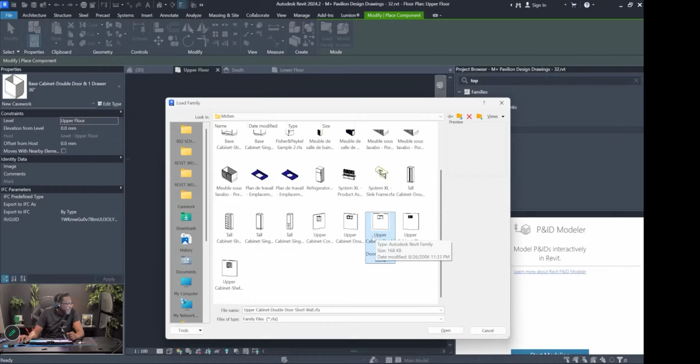Let's see if we can find any here. Upper cabinet shelves, upper cabinet doors. Yeah, we can just place some of these. Let's see if we can find some other ones.

Let's go to load family. This time, instead of going to kitchen, let's go to cabinets. Let's see here, we have upper floor cabinets here. Upper cabinets, yeah, so these are pretty much the same. So we'll put a few of these in.

Also, a great tip: if you're not finding the furniture that you want, you can bring up File Explorer and just search, for example, cabinets, and you will get search results, and you'll see a whole bunch of different cabinets you can use in that folder.

So you can also use the search feature in Windows to do that if you don't know where the folders are by default.

So I'm going to copy a few of these. We're not going to get too hung up on the cabinets. Yeah, 3 of them is fine.

All right, let's look for some countertops now. Countertops, and let's choose one with a sink. We can stretch it all the way to this wall here.

Actually, because the elevator doors are coming out on this side, that's going to be here. So let's move the sink over to the center one here.

And these elevator doors need to be smaller, actually, and they need to be moved maybe to the right. Maybe we should use a single side elevator door for this one.

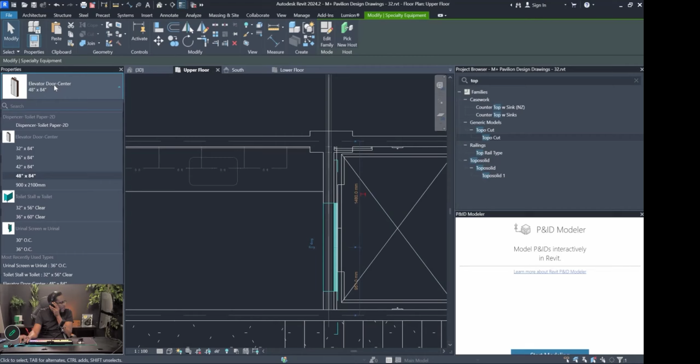So we can actually go in here, load family, and let's go back to vertical circulation, and let's choose the single side elevator door. Let's delete the double-sided version.

Oops, let's flip this. There we go. So now this is the single side elevator door.

What's happening is that we're seeing the lower floor here. We can go to underlay and turn that off, so we can say underlay none. So now we're only seeing what's on the upper floor.

So we are going to have our elevator door on the right here, which works better with our kitchenette because you need to exit the elevator into the kitchen area. All right, so this is going to be our upper floor. That's going to be here.

So let's look at that in 3D. We do have our elevators poking up here, so we need to select them and put them to the lower floor. Yeah, there we go.

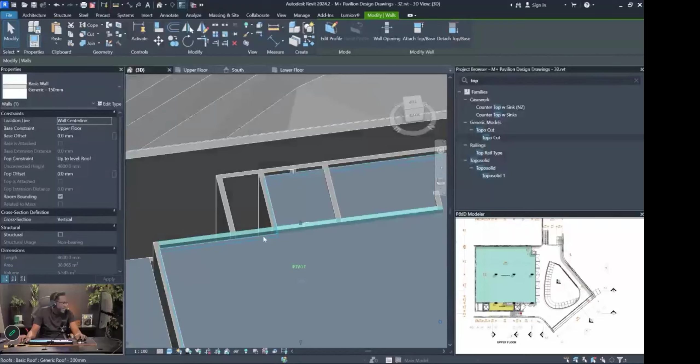Then these walls here, right, so we need to fix this up. We need to cut this wall, and then we need to set these walls here to attach to the top of this floor, like that.

And let's also fix the heights of these elevators here because they're still kind of poking out.

So we're going to offset the top maybe like -6 inches, perhaps -1 foot. There we go. All right, then the roof actually needs to, so we need to trim this to here and then have this come up to this wall here.

We need to attach these two here to this roof. It's telling us that it misses the target because the roof doesn't intersect with those walls, so we need to carry the roof all the way to there.

Right, then we need to attach the top to there. Now we need to fix that wall that's on the inside, so let's go to the upper floor, and there we go. Let's select all of these doors and turn off the masonry frame so we can get the framing on those doors.

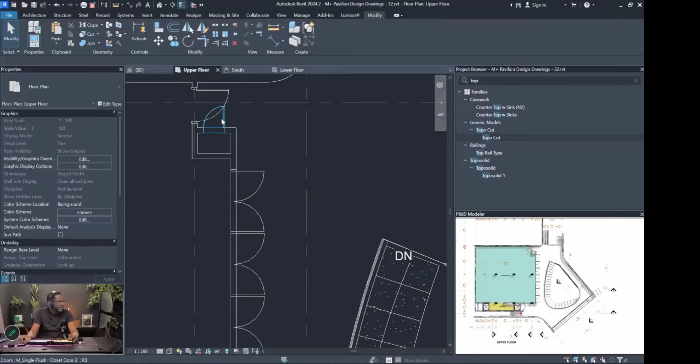And actually, I want to change these doors here to the commercial doors. So what I'm going to do is change these out to these commercial doors. Then I'm going to create a new version and call this 2-foot commercial door.

And I'm going to change the width to be 2 feet. So let's use the commercial doors in these areas, and let's set the opening percentage to 30 degrees. There we go, let's flip that. All right, now let's look at this in 3D to see what we've got. So we have our loading bay, an elevator here.

We have our back door, we have our doors here. We still need to fix some of these floors. So I'm going to go to the upper floor, select this area and go show in 3D.

These new walls that I just added for the bathroom all need to be attached to the underside of this slab. There we go, so now we're not seeing them there, that's good.

Let's turn off the section box and inspect to make sure we have everything. We have these as well, so we need to also attach these to the underside of this slab.

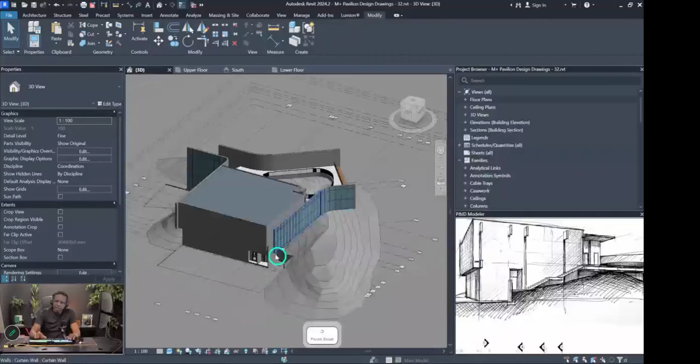So in inspecting the building model here, we see some little things we need to correct. This needs to go down to this level here. Actually this wall should probably get a foundation wall. If you notice, the foundation wall comes to right here.

Let's go to our lower floor here, and let's select this area. We're going to isolate it. All right, so now we've isolated this area. Let's see what we have here.

Let's select our section box. Ideally we want this foundation wall, we want this wall to also have a foundation wall. So we're going to copy this, extend it this way, and then copy this guy here. We're going to align here to this wall here, and align, there we go.

Let's see, okay, let's align this one here. Actually, right, because this is quite long, we're going to carry this down. There we go, so now this wall here has a foundation wall below it.

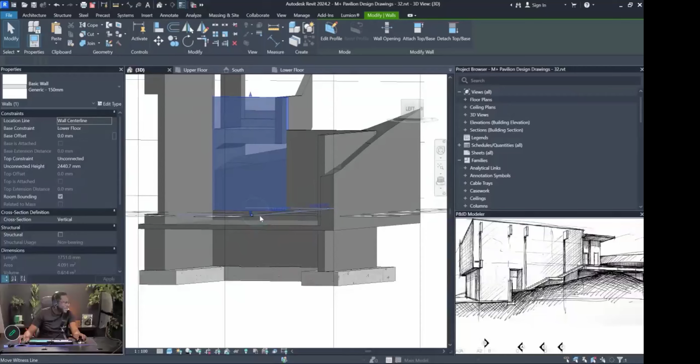We're going to take this all the way down to this foundation level. So we're going to select these walls and say that the constraint here is going to go to a foundation. Let's not take it to the foundation.

We don't need to, because the foundation wall actually comes up to meet our walls here. We just need to align it. There we go, right, so this is our foundation walls here.

All right, great stuff. Now we also need to add our beams to this section here. Notice that we have some beams coming across here to join, that's what's tying this wall together, and those beams are coming from these walls along here.

So let's look at this from our top view. Let's go to floor plans, let's go to roof, and while we're on the roof we're looking down on the upper floor. But let me switch to, okay, let me go to the upper floor plan.

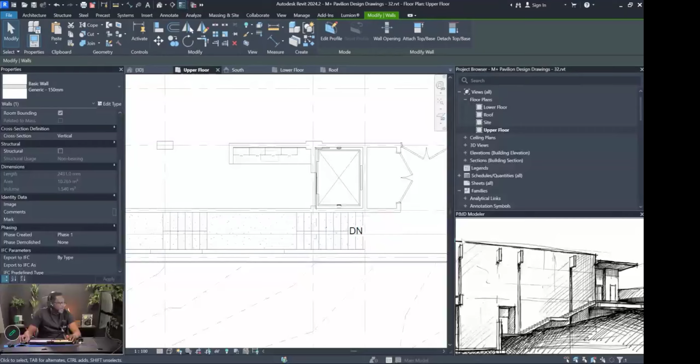Right, so we would actually have beams coming across this area here, here, and from this area here. So I can see we have one coming from here. Oh, that's actually along this grid. So that's coming here. So we've got one coming on top and below, and then one coming here and here. All right, so we're going to actually put those in.

So we're going to use the wall tool to get those in. We're going to go to wall, and we're going to use the 200mm wall. So we know we have one coming across here, so that's going to be this one here. So we have one up top and one below.

Let's look at this in our 3D view. So here we have it here. So for these, what we can do is just perhaps align like that. And what we can say is, there we go.

So we can say that the base constraint of this be, let's try level 2 ceiling. There we go, and the top constraint is going to be roof, and it's offset 400mm.

That's good. Let's copy this again, and then we're going to paste it, and then we're going to align it to, let's align it to the upper floor.

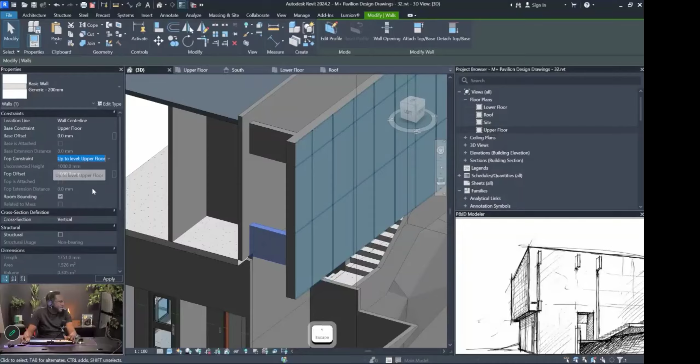It's going to be down here now. The base constraint is the upper floor, and the top constraint is the same upper floor, but just offset 1000mm, I think that's fine.

That can work, so that's going to be these two here. Now we don't know the sizes of the beams that are required here, so we're doing an educated guess. Usually what happens is that the structural professional will do the calculations as to the actual beams. We're just putting in some educated guesses.

All right, so let's actually cut this thing down to here. All right, so let's copy this. Let's copy this here and then align it.

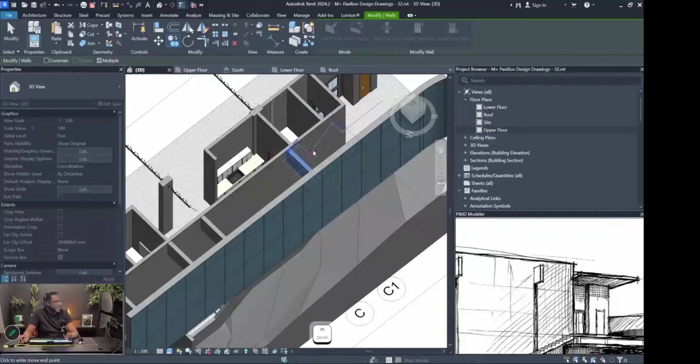So we have one here and here, each side of the opening. Actually, there's a beam that comes across here that's tying to these beams. So we can have another one here, let's go up a bit. You can see that we do have a beam that's going to be there, so we can align the center of that to that beam. And then we have another one here. All right, so now we have those elements in place.

All right, so at this point, let's change this to black and white, back to white background. So we have now finished our BIM model of our building. That is going to be our upper floor, and this is going to be our lower floor.

Now that we've finished the BIM model, we need to start working on our plans, elevations, and sections, essentially our drawings. So far we have only completed the model. Now we need to start the drawings, which will have the appropriate detailing, annotations, and dimensioning, depending on the type of plan. Some of the plans are going to be floor plans and some are going to be elevations. We need to modify our drawings to fit those criteria, and also start putting our drawings on sheets, organizing our sheet names and sheet titles. That's the next step now that we have completed the BIM model.